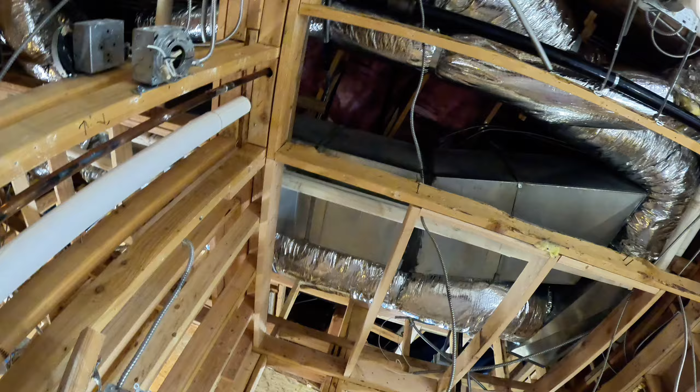All right, y'all, so right here it's a brand new TI. As you can see, there's a lot of stuff just hanging everywhere. There's existing pendant lights there that we have to move, they're gonna get relocated. There's a lot of things that have to move. Everything has to move. The only thing that's staying is the existing can lights, and there's about 2 to 3.

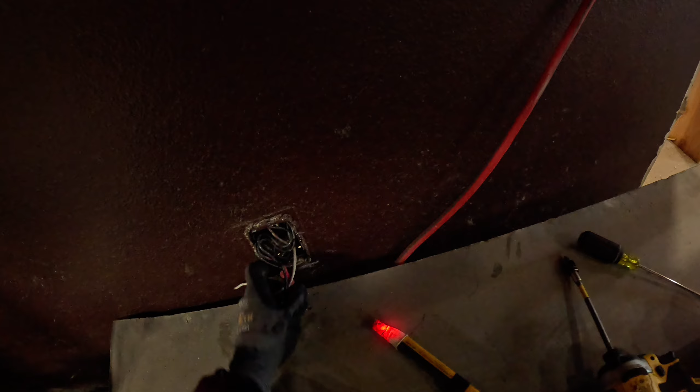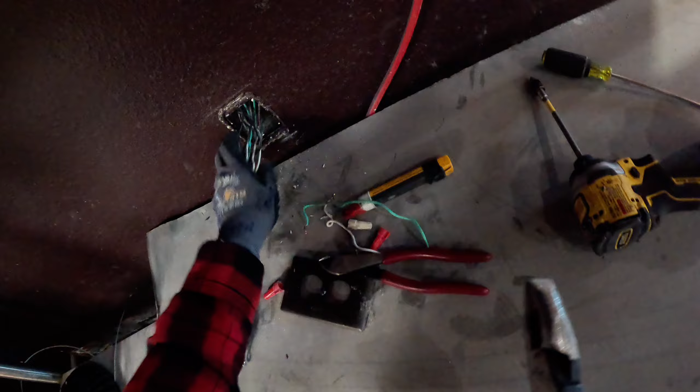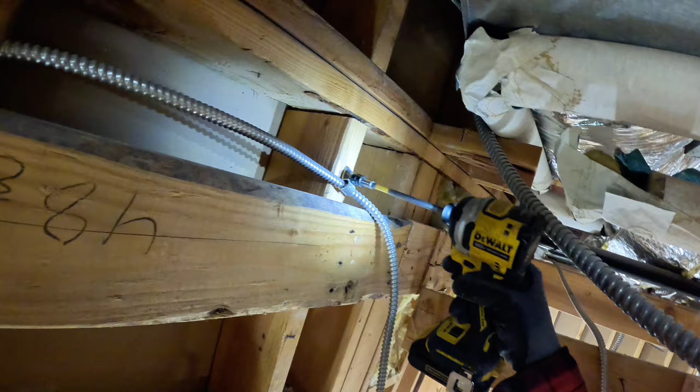So we're just gonna go ahead and start looking at the circuits that we have, because everything is tied together. What I'm gonna do is start disconnecting things, because this outlet here goes to the other side, but because they had to remove studs and stuff like that, they're outside the studs now. So we gotta remove everything and rerun from that outlet all the way to the other side. See how it just goes down like that? Well, that has to get reran because they reframed everything. I guess they made it taller or something, I believe they made it taller. I guess there was something furred out there.

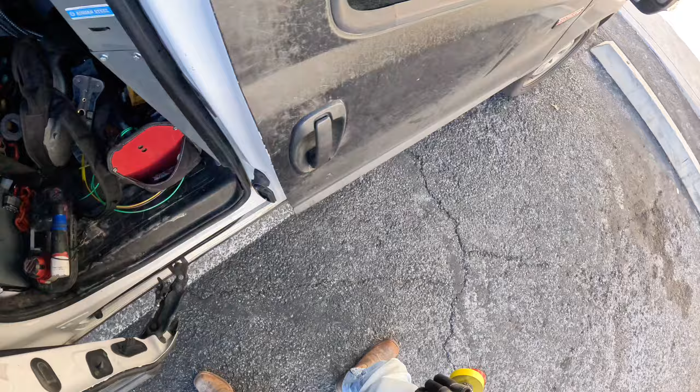So here we are in the backpack, the Klein backpack. I always say, if it ain't Klein, it ain't mine. We're getting our speaker, getting some music, getting some other stuff, getting a charger. I like these battery packs right here. Battery packs will charge everything, man, you'll have like 3-4 cell phones.

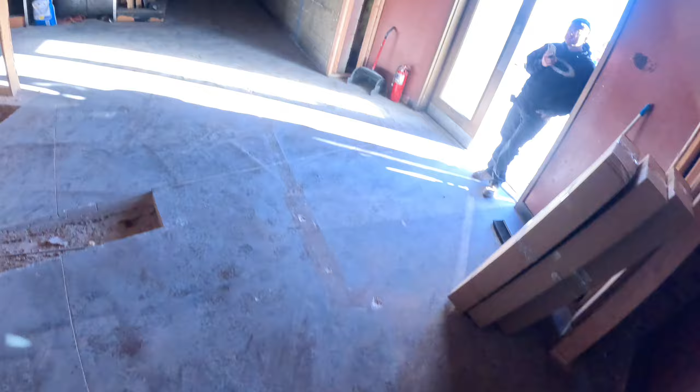I always play music, I don't put it loud though, because not everybody likes the type of music that we play. At this job site we had like 4 different music playing, one over there, one over here. I have my own music playing, I play Mexican music for the most part. Unless I'm with other people, then I'll play something everybody likes. I like all type of music, but me, I like to prefer Mexican music when I'm by myself or got my own little stuff going on. Corridos, like some Mexican stuff, that's what makes me move, right? I like music, man, music makes me move. A lot of people can't have music.

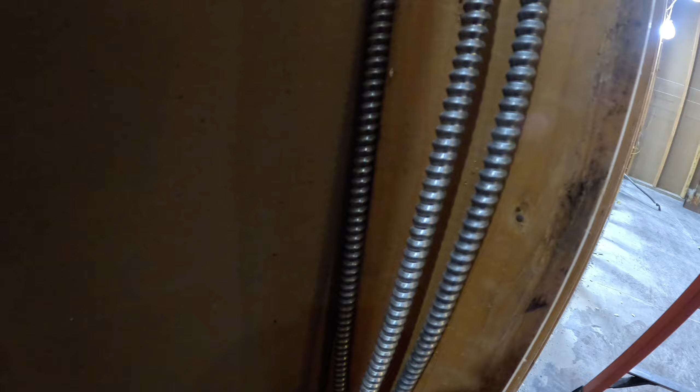Like when I was in the union, I worked for the union for a long time. Can't have no music in the union. It was really boring, but it's safe. Some people had like the glasses, I remember when the Ray-Ban glasses came out, they would put music, it'd play music. I'd hear my coworker have some music in his ear, and I'd be like, 'Oh, you got some music?' Union was cool, man.

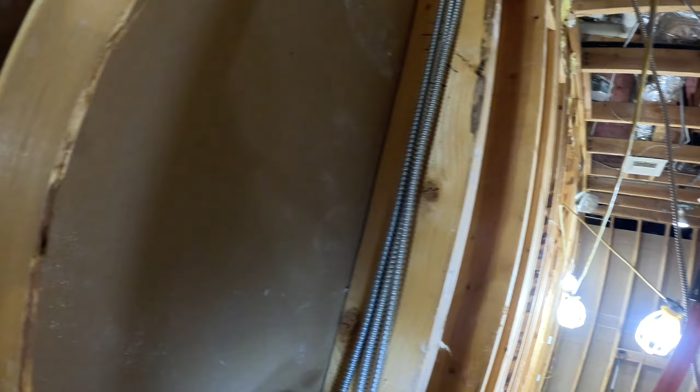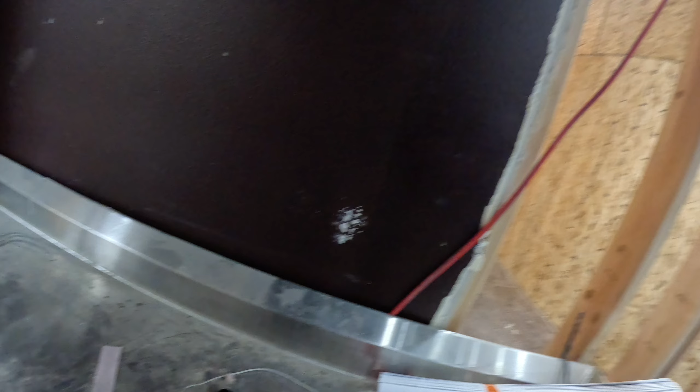I loved the union, it was just a lot of... I have more freedom here. I know the owner, I get jobs, I get more than 50% of it, so you can't have that in the union. You can't have the freedom that I have outside the union. So I love the union, don't get me wrong, the union is amazing, brotherhood, IBEW, I love it. But it's just I have now the freedom to work with a company like I want to work. I can go get my own contracts and work with the company, materials, everything at my disposal, right? I have everything at my fingertips. So why not, man? If you could do it, why not?

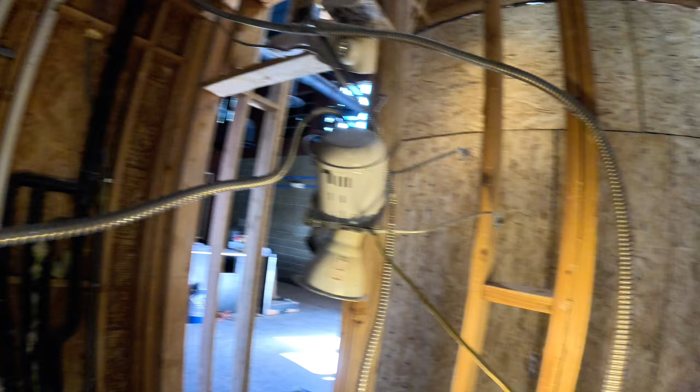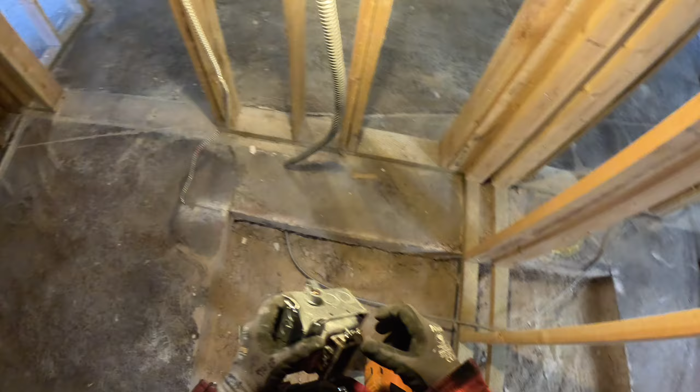So I'm making a lot more money now, and I got jobs, right? And the best part is this job right here is not under my contract. So when I don't have work, I can go work with him, and when I bring him work, we all make money together, why not? So I don't have this freedom in the union, and the union is wherever they tell me to go, whoever I work with.

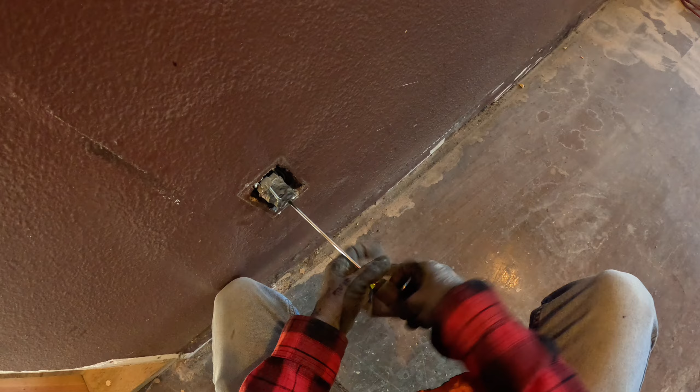When they're done, I'm done. So here we are, disconnected pretty much everything, because we have a lot of lights, a lot of lights that need to be disconnected. We have a lot of things, that's all we're doing is the demo part, pretty much just the demo part of everything, right?

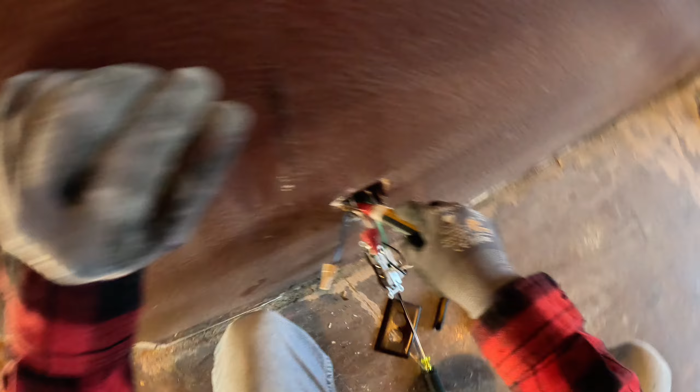Disconnecting everything, and like I said, I like to watch my own videos too as well. I'll be entertained with my own stuff. I always feel like if you can't watch your own stuff, then what makes you think other people are gonna watch your stuff, right? I be entertained with my own stuff, I be watching my own videos.

You know what I mean? We like stuff like this, man. I love electrical, perfect. I really love doing electrical. I love just seeing it done at the very end. And it's crazy because I'll do a whole building, look at the electrical, and act like I did the whole building. You know what I'm talking about?

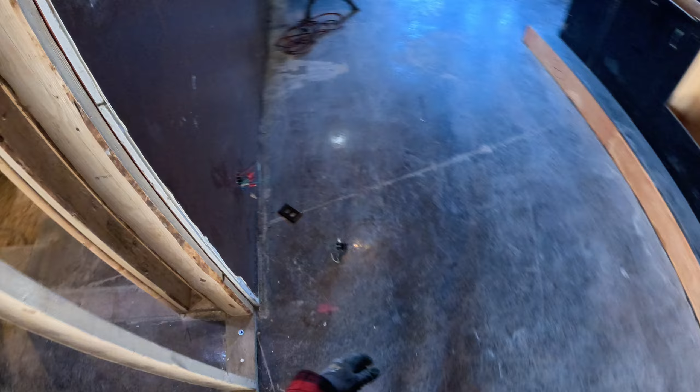I know a lot of electricians do the same thing, right? I mean, but because it's part of our work, right? It's part of, we were a part of it, right?

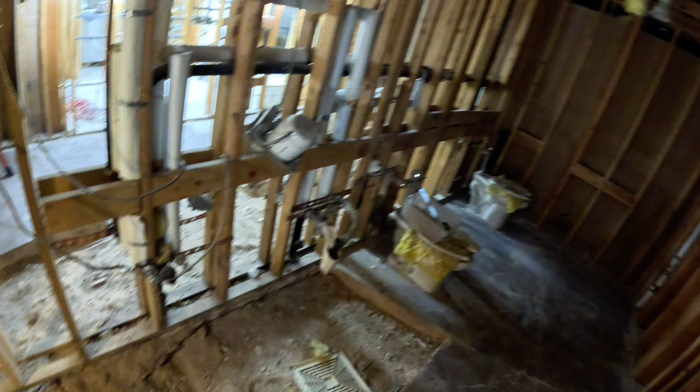And as you can see, it's just me, man. I'm doing this all by myself, this whole entire job right here. I pulled in a lot of the wire on the bar side already, we'll talk about it when we get there. But majority of it is just me, man, getting work done by myself.

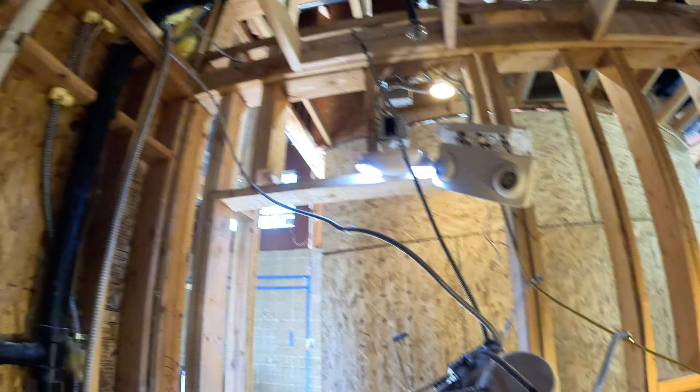As you can see, we're reinstalling these 6-inch cans. We had to buy some new ones too, since those did not work. A lot of the clips were broken. Some clips were reused since they were existing already, so we didn't touch those. It wasn't part of the contract to replace those, but we did anyway. I think we replaced 6 of them altogether. There was a lot of things that weren't on the contract that we replaced, but since these are new people we're working with, we're trying to do good by them.

And this is a good job here, good superintendent on this job. He's young and he really wants to be a good superintendent, and the company that hired him is molding him. That's the best there, because they had previous superintendents that were stuck in their ways. So this is a great thing for this new superintendent. He's very eager and he's on top of everything. That's the most important thing, that he's on top of everything.

I like that I can go to the superintendent and talk to him, and me and him lay things out together, work together. I like it because a lot of the old superintendents that are stuck in their ways will throw it real fast at you. A lot of the times you come in and say, hey, where does this go? Well, I don't know, look at the prints. Then you start arguing and it's a mess sometimes with these superintendents. No-help superintendents is what you call them, they're no help whatsoever. But yeah, that's what we're doing today.

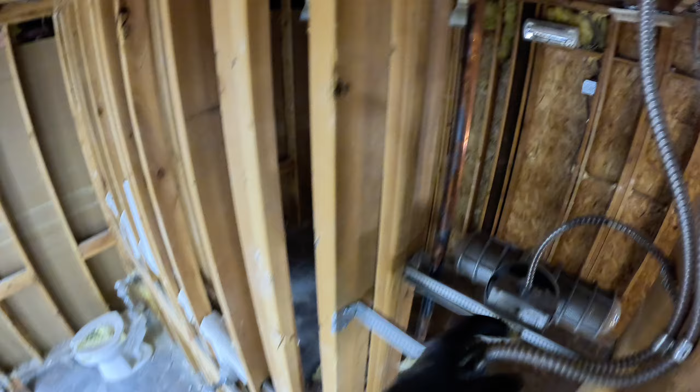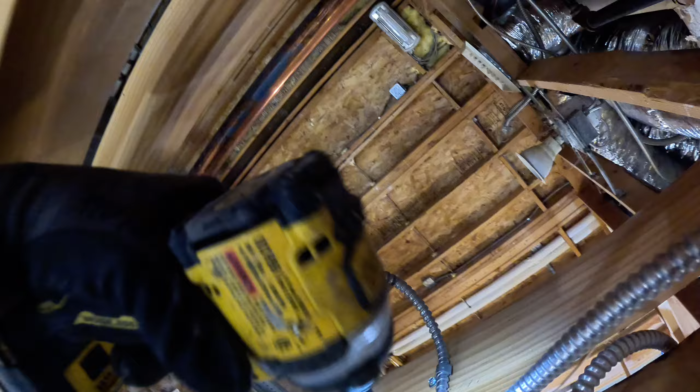We're just pretty much relocating everything. See here, we have some urinals right here that are going in now. So that light is right above the new urinals, so those got to go over about 2 foot each. It's just the whole bathroom is shifting over, it's going to be one big bathroom, and that's why I think they had to raise the ceiling, because the bathroom used to start over there. Maybe there was like a small entrance kind of thing that waved into the bath. I don't know how it was before, you can only speculate, right? But yeah, we got to relocate everything, so that's what we're doing today.

It took me a whole day to remove everything and make a material list, and the next day we came in and installed all the new stuff. But it's just pretty much mapping everything out, cleaning everything up, seeing how it's run, because they ran it different.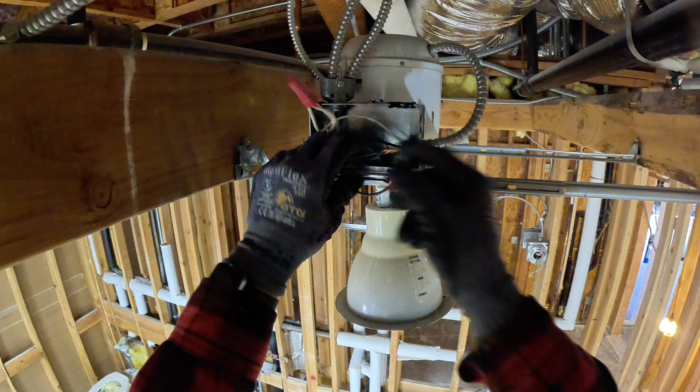What I like to do is strip everything to bare and start over. I hate touching old stuff, I hate trying to add to new systems, however everything is tied together, roped, or linked. I hate touching any of that. What I like to do is remove everything, every single thing, and know that the connections are good, know that every wire is going to be good, put in my new home runs, my new switch legs, whatever's coming in. In this case, you have to have lights, you have to have emergency lights.

In this case, it was tied to the emergency lights. I don't like that. I like to have it on its own circuit, so if that circuit goes out, it'll turn on the emergencies. But I don't like them to be with 12-2, 12-3 in the switch leg.

No, I like to have their own things in there, because you confuse people. Just bring in one thing, have it come into one box. Your 12-2, 12-3 go to a box, and then that goes to your lights. 12-2, boom boom boom boom. That's it. So when those die, those are always constant. Never any switch legs going in and around that.

None of that, man. Make it simple. So when another electrician comes in, they say, okay cool, this is this. It's not a whole bunch of, okay we're gonna get one box, bring everything to it, and then spider out. Stop making it difficult for people. There should be no need to make things difficult for nobody. Make it simple for the next person, and make it simple for yourself, so when the next person comes in, it's simple for them.

A lot of people open up these junction boxes and you have a million things in there. You got to figure out what's this and what's that. For what? That just tells me it was poor planning. It wasn't well planned.

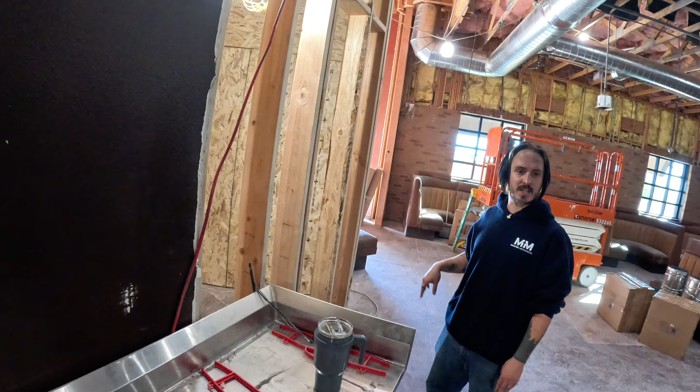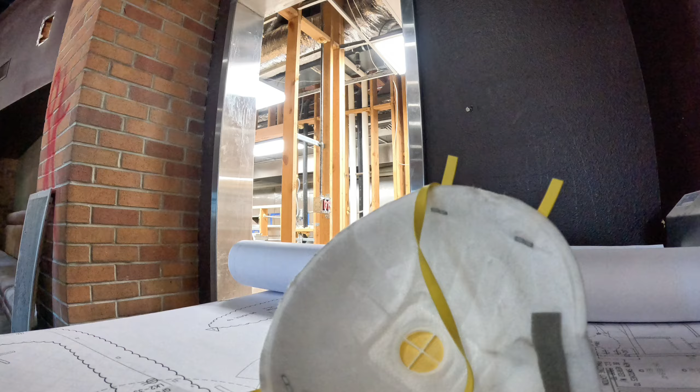I gotta say, man, you gotta be ahead of the curve. You gotta be ahead of everything. Look at things, look at the details. It's all in the details. Everything is right there in front of you. Well, not everything, because like we spoke about the Ansul systems, that's a separate video, so not everything is there for you, but it is up to you to know these things, because if you don't, no one's gonna teach you.

Here I had to take off my shirt. I had a piece of hair on my back and it was itching me. You guys ever have a piece of hair on your back and it's always itching? And you're like, what the hell is this? It's like a piece of hair from your wife. My wife's got long curly hair, beautiful long curly hair. And sometimes we do laundry and there'll be one piece of hair in the back of my shirt itching me all day.

I take off my shirt and there's a long piece of hair back there rubbing me. All right, so here we're taking off what's gonna be the emergencies that go on the wall, the bug eyes as they call them. You see there's a lot of wires in there, man, in the bug eye, like they came in and came out and came in and came out again. Oh no, there's only two in there. There's only two MCs, it just comes in and out. Or is there three? I don't know, I forget.

But I do think it comes from over there. So I don't know why the bug eyes come from over there, like inside of a water heater. You're already in the kitchen area when the lighting comes from the other side, because that's a panel right there. So we're just checking, why is it tied to the water heater, the emergencies? That makes no sense. It's like it's just using a bypass through the water heater just to confuse people. You got a piece of MC going to the water heater, coming from the water heater, and then it ties around.

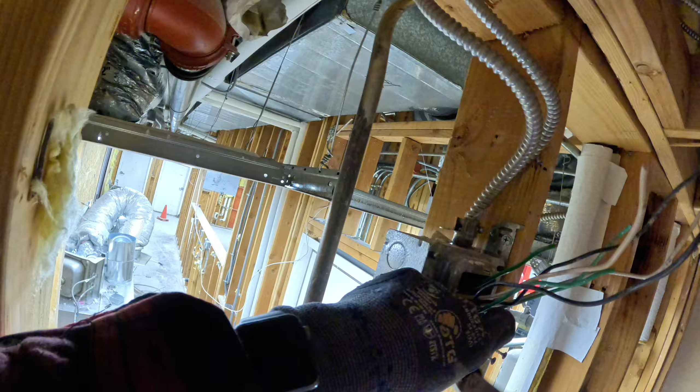At all whatsoever. And we're sitting here with you guys just narrating as we're watching it with you guys. So here we are, we're gonna start working on the lights. See, here we have three lights, but that light right there is damaged, so we have to replace it.

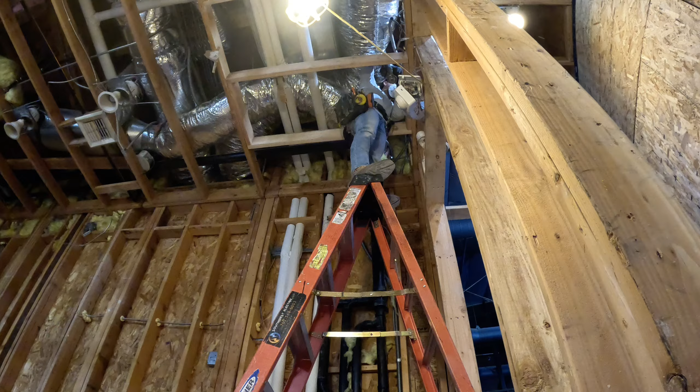And I'm gonna go ahead and say this right now. If you are not comfortable on top of a racehorse going 35 miles per hour on a jockey saddle, do not stand on top of a ladder like this. I am very comfortable that I am not gonna fall off this ladder. This ladder does not move. A racehorse is running at 35 miles per hour while you're on a jockey saddle on your tippy toes, so I don't think I'm gonna fall off of this ladder, but I do not recommend anybody else do this. Do as I say, not as I do.

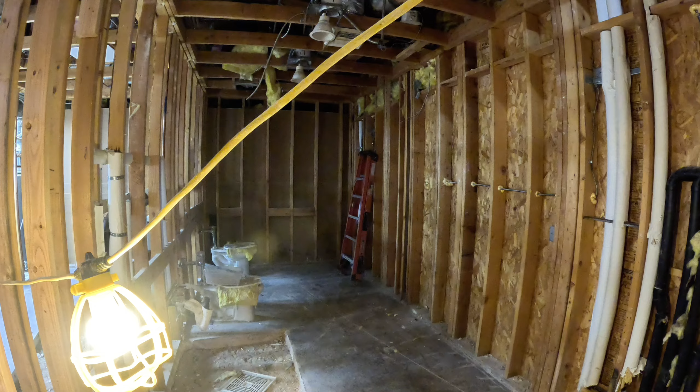Now, as you can see, I'm starting to clean up everything, getting all these big pieces of MC. I actually reused a lot of this MC, and I encourage anybody to reuse anything that you can reuse, right?

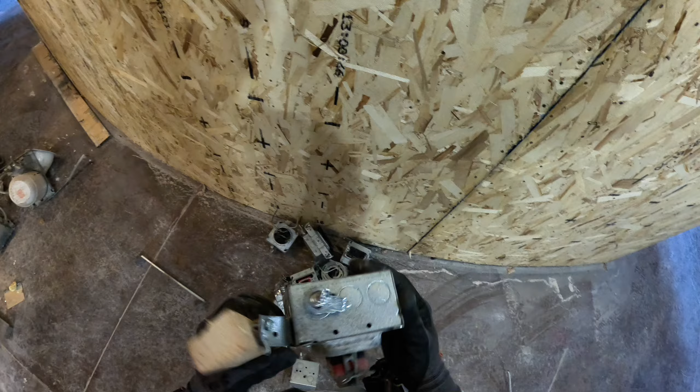Don't waste material. A lot of people scrap the material, like all the wire. I don't scrap wire if I can reuse it, especially wire inside of a pipe. I roll all that stuff up. I'm looking here, what could I keep? Like these mud rings. Mud rings are good, right? Why waste any of those mud rings, connectors and stuff like that? So I save a lot of that stuff.

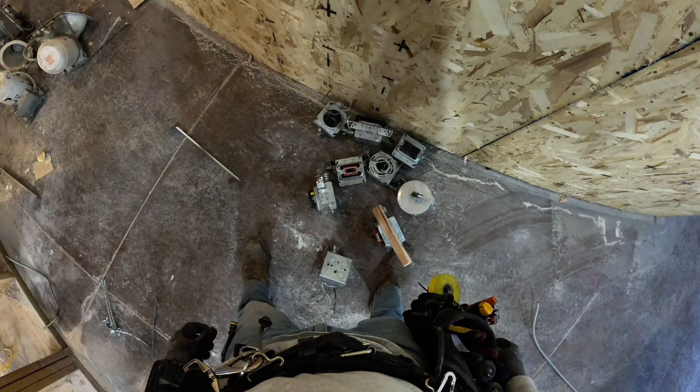Industrial covers, we keep. Any of that stuff we keep, right? We're not gonna waste it, I clean them off. They'll have a pound of cake of dust on them, that's been sitting there. I wipe all that stuff off, clean them off, have my sons go outside with some soap and make sure they dry so they don't get rusted. Clean all that stuff off, right?

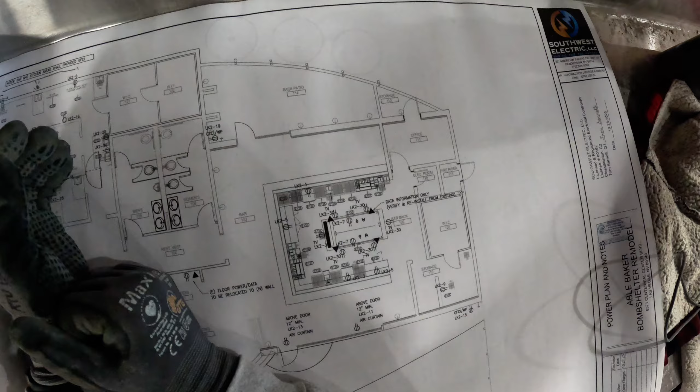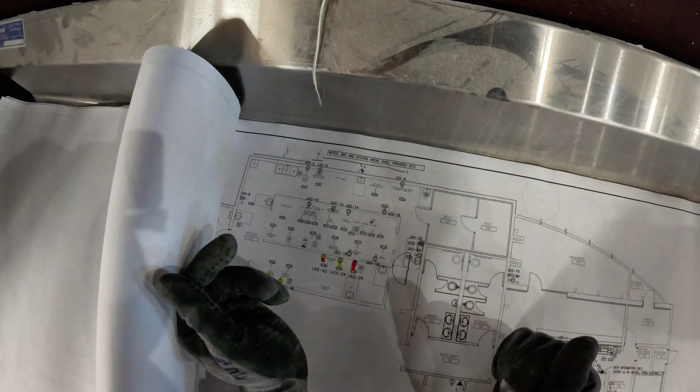You give them $20, say hey son, for your little ones - I got all type of kids, man, kids that are young, kids that are 18. I can have somebody do something, right? I'll give you $20, you clean all these covers for me. I'll give you $20, you sort all these screws and nuts and bolts for me, put them in a case. They'll sit there for an hour or two, collect their money and buy whatever they want, and I get my stuff organized.

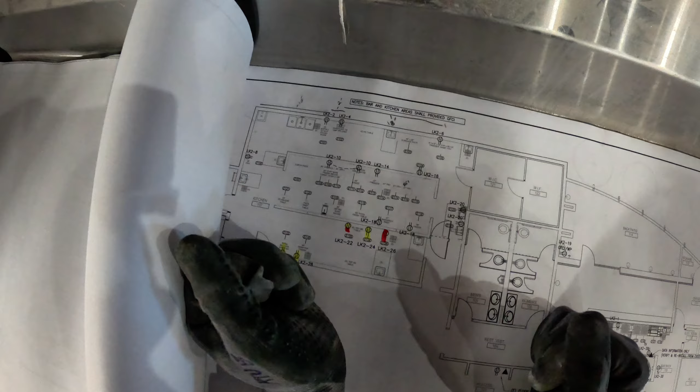And that's how you gotta utilize your kids, man. Don't have them just doing work for free. I remember when I was little, my parents used me as a slave - we didn't get paid for this. But now I'm teaching my kids that you can make money by doing services, by doing things for someone else. You can actually make money, and they'll give you lots of money. I bring them to work with me and let them see it, so they can see that there's people out there that are gonna give you lots of money to do things for them.

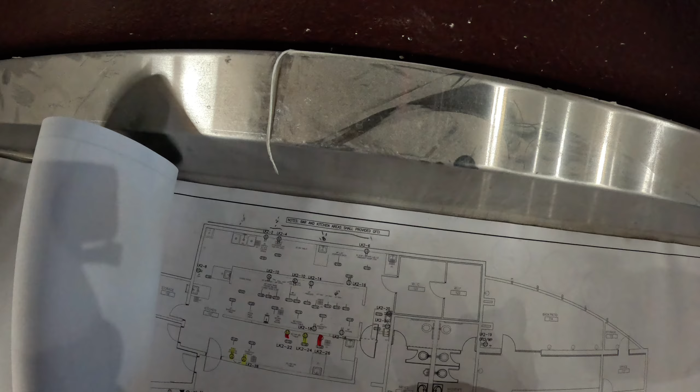That's essentially what we do while we go to work, we just don't think of it like that because we think of work as just going 8 hours and getting paid this much. We never think of how much they make. We need to be making that, we need to start thinking like that. That's why a lot of companies don't like to tell you how much they make - because then you start thinking, whoa, he's making this much and I'm making this much. That's why a company never likes to tell you how much they're making.

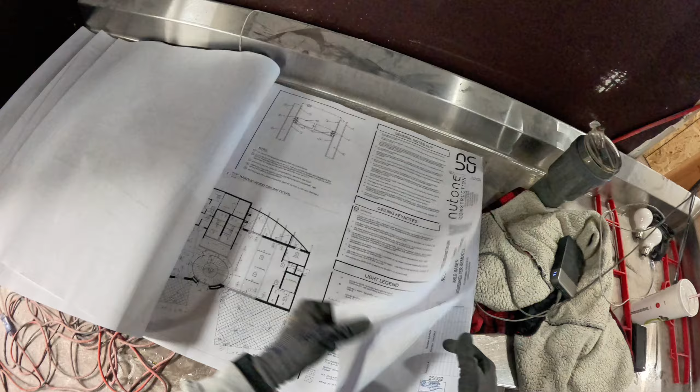You start asking - if you don't ask, then why are you there? Why are you in a company that you're never gonna go nowhere? You need to start thinking for yourself, not have someone think for you. Here, I'm thinking for myself. They give me a set of prints, I do it how I want to do it. I strip things how I want to do it. I do things how I want to do it.

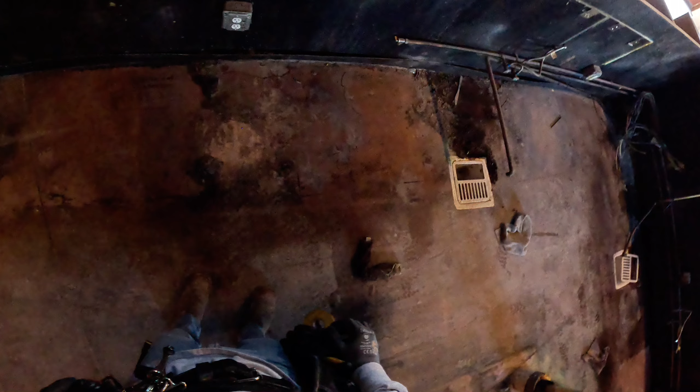But that's how we make money. We make money because that's how I do it. I do things in ways that makes us money, and it just keeps making us money. I don't deal with things that's gonna cost us money in the future. So my company trusts me, they let me go, and the reins are loose. That's where you want to be - you want to be in a place where your reins are loose.

Damn, son, where'd you find this?